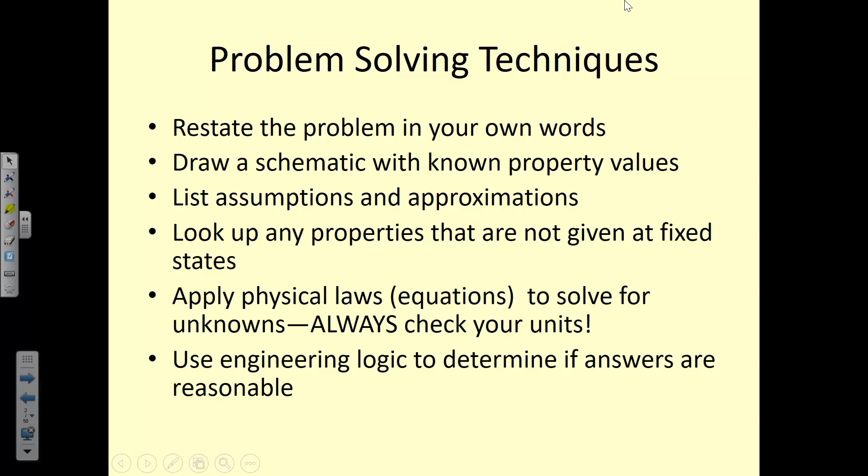All right, so for the exam itself, I have made an executive decision that you will be allowed to use your textbook on the exam. Is there anybody who doesn't actually have a physical copy of the textbook? PDF copies? Yeah, I do that too. I got one from the library because I was waiting for mine to come in. I just haven't returned it, I'll borrow one of his.

Okay, so who else needs one? Another one today, okay, three textbooks. I have a couple of extra ones. Some of them are older editions, but it's the same information. One of the main reasons is that there are so many equations we used all throughout the semester, and on the final exam there's going to be a lot of different tables you'll have to reference. I don't want to have to print a packet that's like 16 pages long for every student.

Having said that, just because you have your textbook on the exam doesn't mean you don't have to study before the exam. Because if you don't know where to find the information in the textbook, if you don't know how to use the tables, if you're relying upon Professor Waite to give you the correct tables for your problem, that's not going to happen, right? So you have to really know and understand how to use the book, where to find things. I would recommend using your book as a study tool and flagging certain problems or areas. At the end of each chapter, right before you go into the homework problems, there's a nice summary page, which would be good to identify and flag in each of your books.

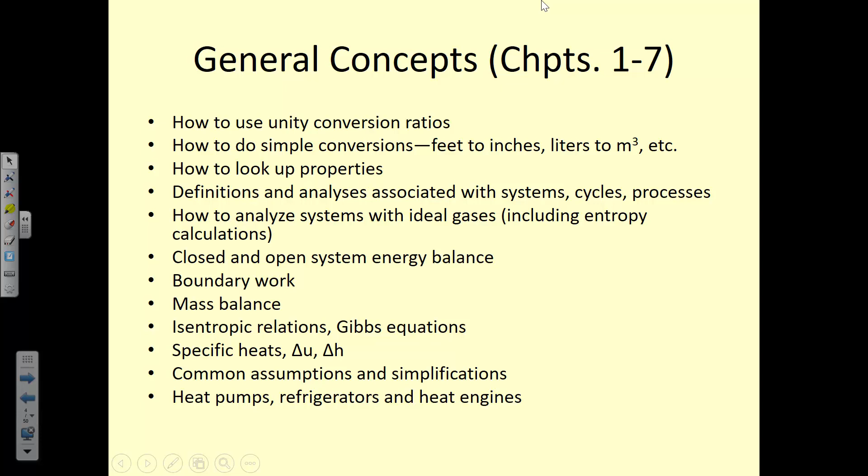General concepts - this is all stuff from last semester, you should know how to do all of these types of things: using conversion ratios, definitions that are basic to thermodynamics, like what is the first law, second law, third law, what is a system, what is a process, what's the state postulate, things like that. How to set up a system, the difference between a closed and open system. Also, any common assumptions or simplifications we've made throughout the 2 semesters, like is it an ideal gas, is it adiabatic, or is it constant temperature - I will assume you know how to make those for any given problem based on the problem statement. You should also recognize and know the difference between heat pumps, refrigerators, and heat engines - that's fundamental to understanding the problem statement for whatever mystery megalodon problem I give you. It could be a refrigerator, a heat pump, or a heat engine. How do you know the difference between the 3, and how would you know? Being able to identify and apply the appropriate equations is pretty important.

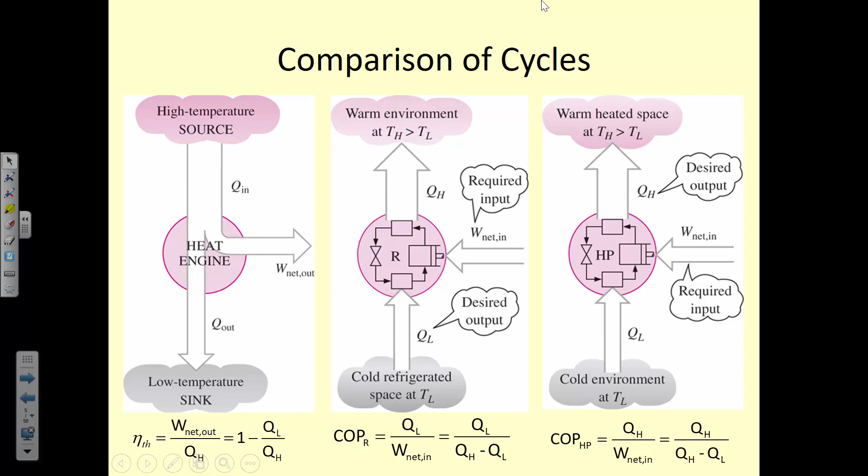Chapters 8, 9, 10, and 11 - these are the main bullet points from each. Chapter 8 was all about exergy. I'm not going to give you an exergy problem on the exam - you can say hallelujah right there. But I may ask you to calculate a thermal efficiency. I won't ask you to find the exergy destruction of all the steps and phases of some huge megalodon problem - that's not going to happen. But you should know what exergy is, and you should know how to calculate thermal efficiency. Chapter 9 was IC engines - you just need basic information: the difference between spark ignition and compression ignition, gas versus diesel, Otto versus diesel cycles, and what the air standard assumptions are that may come up.

And then how it is different—this applies not only to IC engines but other problems as well—the difference between assuming constant specific heats and assuming variable specific heats. We learned about that in more detail for ideal gases in Chapter 9, and we've used it in other places since. So what does that mean? What is the difference between assuming variable specific heats or assuming constant specific heats? I'll just throw that out there right now.

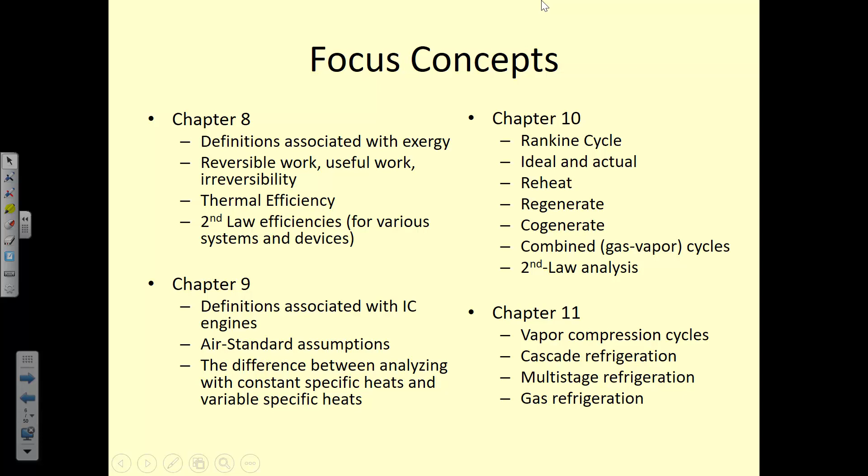But we're going to do just a little example of that again today, where we look through and say, okay, we're not going to solve this whole problem, but we're going to start with this system and say, okay, what do we know? What do we need to know? How do we find all of the states of this?

So this is something that has 12 states. By reading the problem statement and using some of the information given to us at the outset—they haven't outlined or dictated all the pressures in the problem statement, but they said see the table. And the table has the pressures of states 1 through 8. How do we find the pressures at 9, 10, 11, and 12?

And these are closed feedwater heaters, which means the fluids aren't mixing. So this just goes straight through, and this goes straight through, with the exchange of heat.

So pressures 9 and 6 would be equal? Okay, yeah, so pressure 9 is going to be equal to pressure 6, so it's 1400. And 7, 10, and 11 should all be equal too, right? 7... well, why 10? Oh yeah, 7, 10, and 11. Yeah.

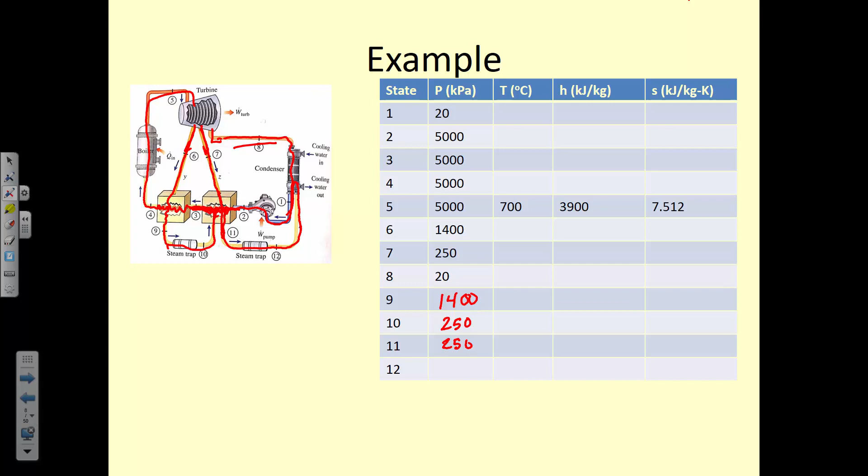Okay, so we've got the pressures now. What about the pressure at state 12? What is that? It means same as 11?

It won't be the same as 11, because this steam trap acts like a throttling device, so the pressure will decrease from 11 to 12. If it's a throttle valve, then H11 is the same as H12, right? Ooh, yes, good point. So 11 is equal to...

Okay, go back to the pressure—how do we know what the pressure is at state 12? Condenser pressure. Yeah, it would have to be the same as the condenser pressure. What's the condenser pressure? 20 kilopascals. Okay, so you should be able to look at these problems and think, okay, what's going on here. That looks good. All right.

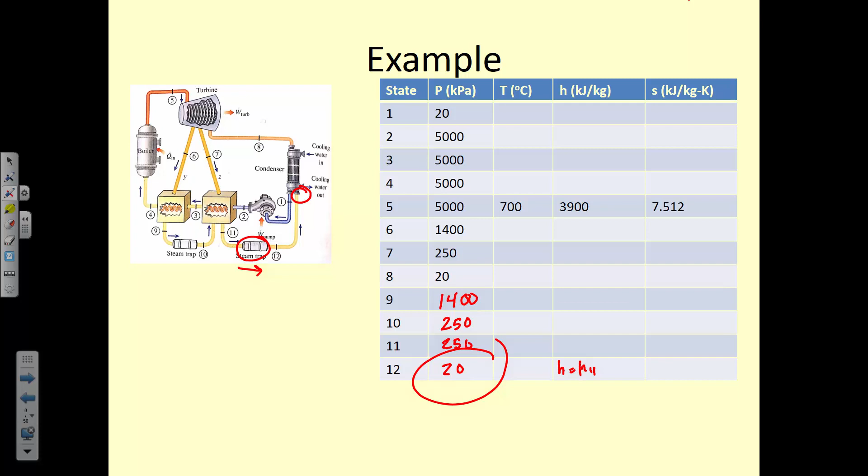So let's start thinking about enthalpies. We have the enthalpy at state 5. We looked that up because we know the pressure and temperature that was given. So we can look up the enthalpy, we can look up the entropy. Assuming it's an isentropic turbine, what do we know, or what does that tell us about some of the other states?

So we know state 5. What do we know about any other states? The entropy is the same as what's coming out. So at 6, 6 or 7 or 8, or what? All 3 - 6, 7, 8. All of them. 6, 7, and 8 are going to have the same entropy.

7.512. So now we know a pressure and we know an entropy, and we can find the rest of those enthalpies from the table. And these all happen to be superheated.

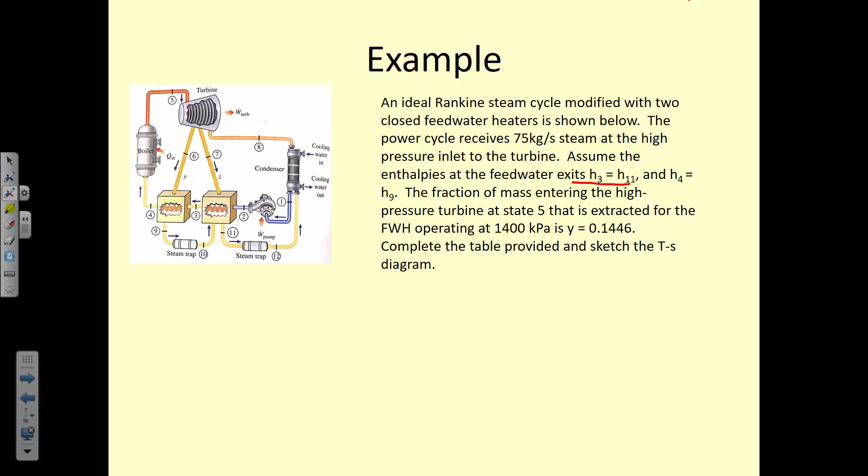All right, what other states can we find? I guess we should look at the problem statement. Assume the enthalpies at the feedwater exits: H3 equals H11 and H4 equals H9. That's good information. So this is going to be equal to H9. This is going to be equal to H11. We don't know 9 and 11 yet. How do we find those?

You said this was for the closed feedwater heater? Say that again? You said it was for the feedwater heater, right? H9 and H11... No, H9 equals H4 and H3 equals H11. H9 and H10 are the same. Okay, yeah, so H9 and H10 - we have another throttling device, so H10 is also going to be equal to H9.

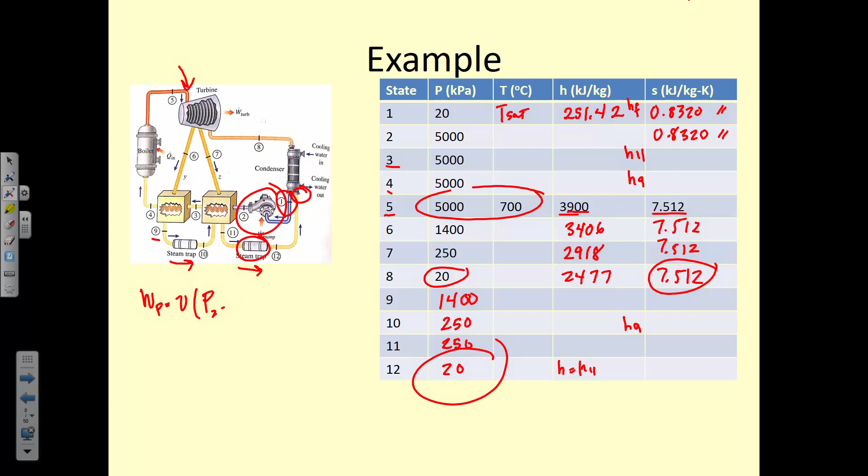Okay, what about state 2? Can we find anything about state 2? We can find the enthalpy based on the pressure. So from 1 to 2 is pump work, right? So the work of a pump is equal to V times P2 minus P1, which is equal to H2 minus H1. So H2 is equal to V times P2 minus P1 plus H1. Okay, so we can do that. We can look up our specific volume - it's V sub F at state 1. And when we calculate this, we find it's 256.48.

Okay, so some other things that we can assume is that state 9 and state 11 are saturated liquids, that they exchange all of their heat with this feedwater so that they come out as a saturated liquid. So anytime you come out of a feedwater heater, it's a saturated liquid, generally. But 3 and 4 actually end up being slightly compressed liquids in this problem. So state 9, state 11 is liquid coming out because we want our feedwater heater to exchange all of the heat from the steam with the pumped water.

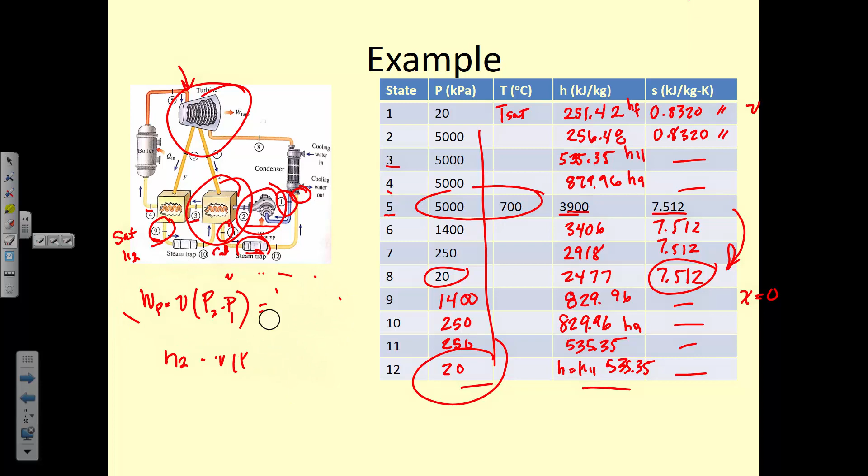And then if we were to look at this on a T-S diagram, how many lines of pressure would we see? How many different pressures do we have? 12 different pressures? No. Four - yeah, there's 4 different pressures. So we have 5 megapascals, 1.4 megapascals, 250 kilopascals, and 20 kilopascals.

So if we were to draw our points, if it's isentropic, it goes from this state 5 to 6 to 7 to 8. 8's kind of like maybe on the line, maybe under the line. And then we know that states 1, 11, and 9 are saturated liquids, and 9 is here - no, 9 is 1400.

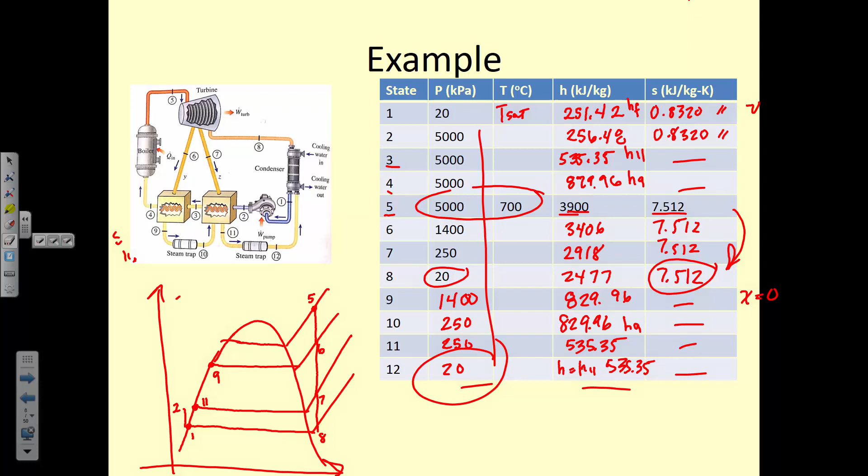Okay, we know that from state 1 to 2 is isentropic. And then we have all this going through here. States 2, 3, and 4 are also at 5 megapascals - this is 5,000, 1,400, 250, and 20 - so they're also on that line. State 4, state 3, and then from state 9 to state 10 is a constant enthalpy process, and state 11 to state 12 is a constant enthalpy process as well. Constant enthalpy just looks like a diagonal line on the TS diagram. I think that's all our states.

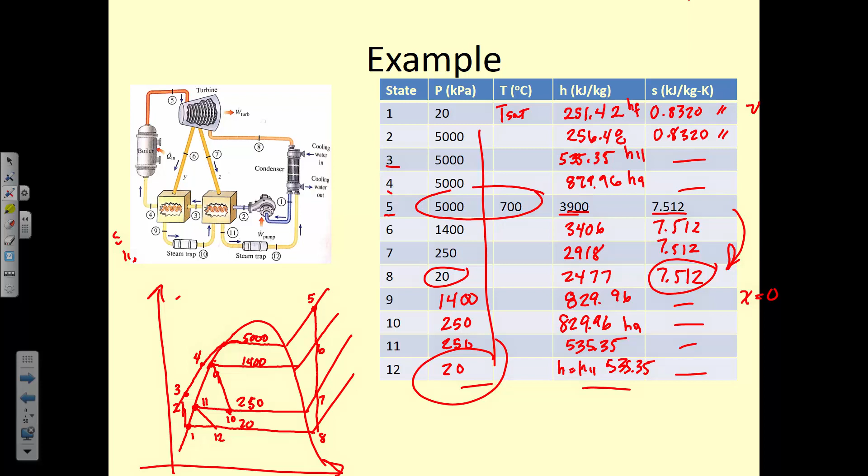All right, so again, review those types of problems. We've done so many examples of them throughout the semester, so look at them, review them, make sure you understand how to find things in many different scenarios. Maybe you're given the inlet conditions on the turbine, how do you find the outlet? Maybe you're given the outlet conditions, how do you find the inlet? If you have pumps, if you have throttling devices, whatever things you have available to you as tools to analyze and look at them, make sure that you understand how it works and how it's different.

Okay, so chapter 12 was when we were looking at all those partial derivatives and Maxwell relations and the property relations for the real and ideal gases, and we were using the generalized departure charts. I'm not going to give you a problem where you have to use the generalized departure charts on the exam. But you may be asked to use some of these property relations, like you should know how Maxwell relations work, so refer back to the old exam for examples of types of things I might ask you on that.

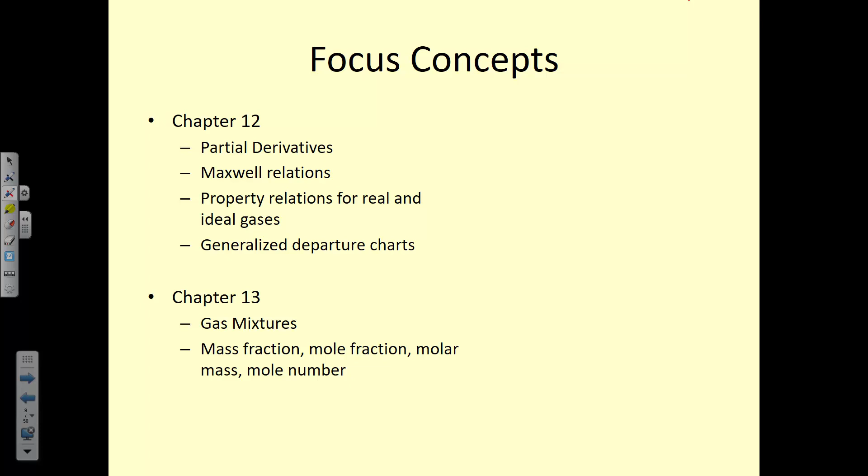And then chapter 13 was all about figuring out how to analyze mass and mole fractions of combinations of substances, and in that case we were looking at gas mixtures for that.

So the Maxwell relations to review - these should be familiar - they are based upon the 4 Gibbs equations, and then we come up with these Maxwell relations which allow us to calculate a change in temperature versus volume at constant entropy and say, okay, that's the same as if we wanted to calculate the change in pressure versus entropy if we hold the volume constant, but it's also negative. So knowing how to take one of these equations and use it to find the other one - not the derivation of how you get to this point, but let's say I gave you some equation for specific volume in terms of temperature and pressure, you would need to know how to take the partial derivative of that and then apply the Maxwell relations in order to find whatever I asked you to find.

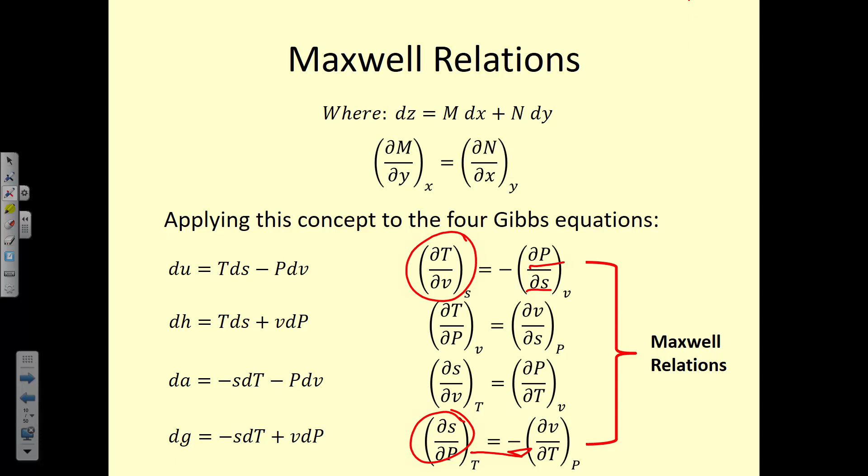And we've done examples of that in class and on the exam. We had a problem that was similar. So in general, finding properties using these equations - if you look at it in the general form, or if you integrate it from T1 to T2, and then use the departure charts - I'm not going to ask you to do that, but that's how those equations work. And then the general form for internal energy, the general form for entropy, and again, we're not going to do the approximated form of the departure charts, because there's so little time for me to torture you. I have to really pick and choose what I want to use.

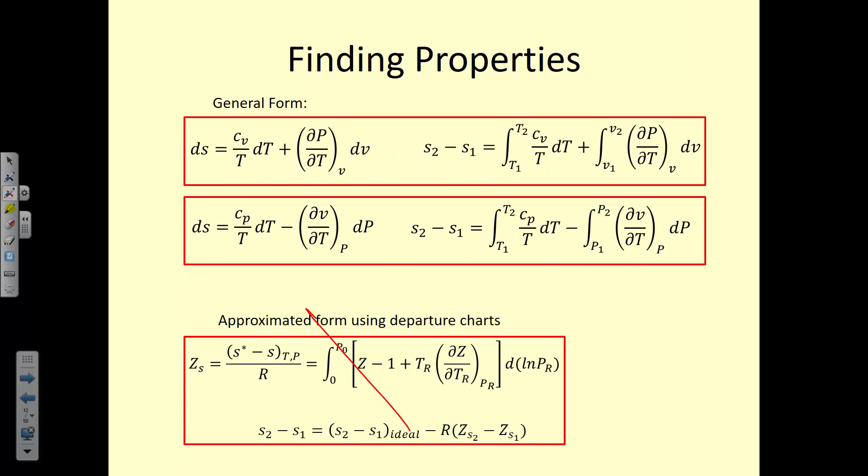Okay, chapter 14, or chapter 13 - oh, it was there. Okay. I didn't talk about that because we're doing it in other ways.

Okay, chapter 14, specific and relative humidity, so knowing the difference between the two, how to calculate them using these equations. If you need to calculate how much water vapor is in something, pay very special attention to this, to the homework problem that we did, to the example that we did in class of how to calculate how much water vapor is in a mixture of something, say for example in a combustion process - that's important that you know how to do that. So that hails back to chapter 14.

And then we talked about finding the enthalpy of that mixture of air. So atmospheric air is both dry air plus some water vapor, so knowing how to calculate or find the enthalpies for that mixture.

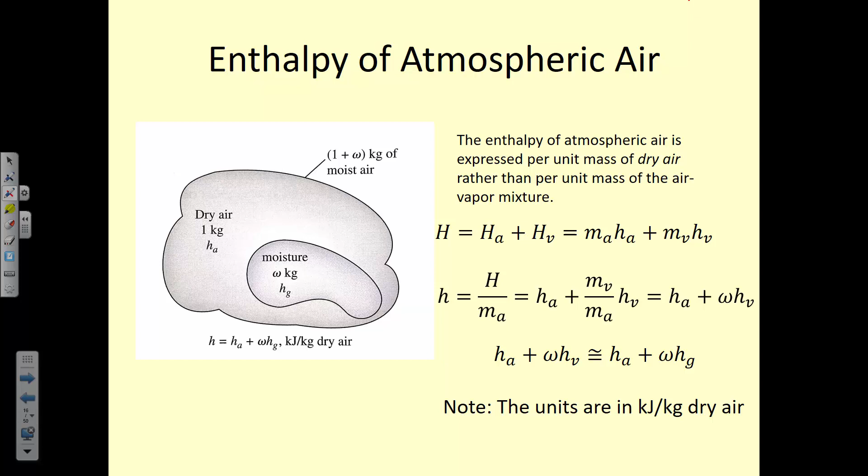Simple definitions like what is the dew point, what does it mean, how do I find it on the diagram. The adiabatic saturation process was a way for us to determine an unknown specific humidity. We can also do the same thing using dry bulb and wet bulb temperatures.

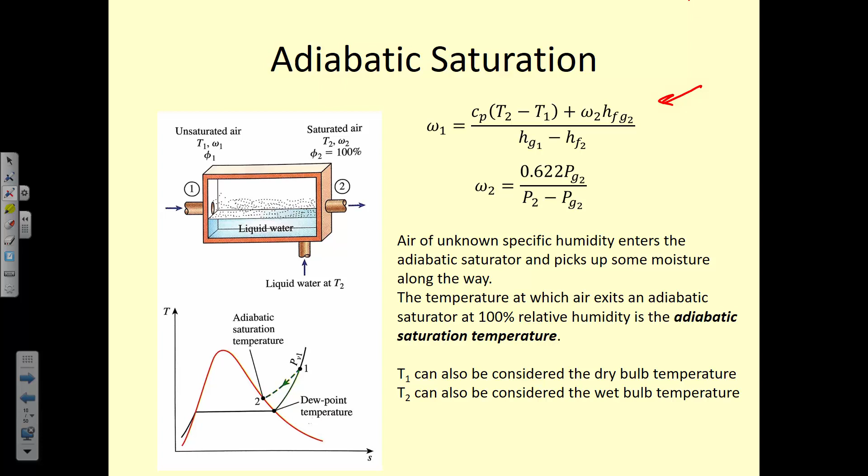Understanding and knowing how to use dry bulb and wet bulb temperatures in these equations to calculate humidity. So we did that as an experiment in class. We've also done homework problems and example problems in class about that.

And then using the psychrometric chart, this may be one that I end up printing and including in the exam, because I will probably have you draw a process on the psychrometric chart. We've done examples of that, and there are some we'll look at in just a minute with heating, cooling, humidifying, etc. I want you to be able to pinpoint two points on the chart, but then also figure out how you get between the two points, because it's not just going to be a straight line.

Sometimes you cool the air first, remove some of the humidity, heat it back up. You should understand what each of those processes represents on this chart.

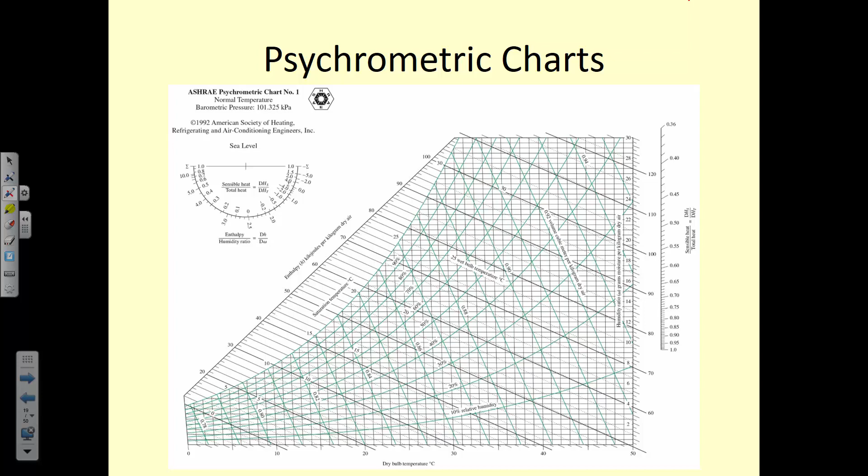So if we look at the lines and what they mean, what they represent: we have constant specific volume lines, enthalpy, wet bulb temperature, dry bulb temperature, humidity, the saturation line, and then constant relative humidity lines that go through like that.

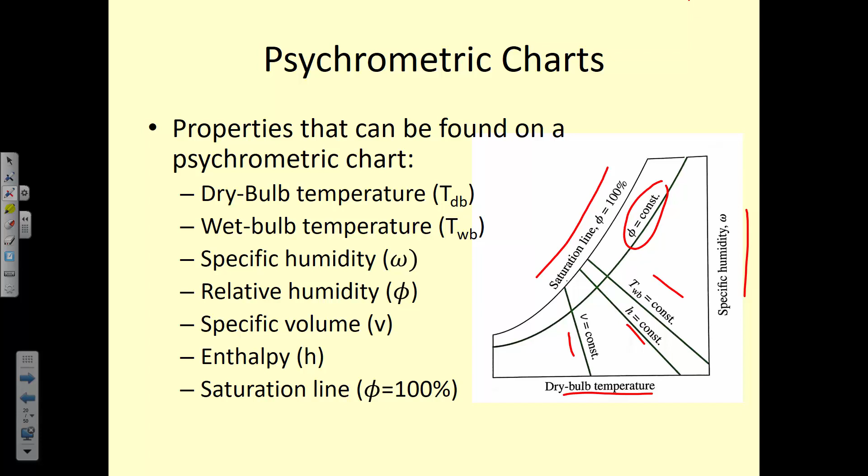So knowing how to find those lines, what they mean, how to identify points given two independent variables on the psychrometric chart, and then as we go and look at problems, what does it mean to dehumidify or humidify, okay? And what is the difference between increasing relative humidity or increasing specific humidity? How do I do one versus the other, right?

So what's the difference between relative humidity and specific humidity? Or first, what is specific humidity? It's a mass ratio of kilograms of water to kilograms of air. It's the amount of water that's in the air. Okay, so what does that mean? What if it's 0? That's dry - there's no water in the air.

And it can go from 0 up into - well, it's raining. It's not relative humidity, it would be like you're not in air anymore, you're just in water. So if you go into a river, this specific humidity would be some very high number. Okay, so no, it would be infinite - yeah, it would be infinite, because you'd be dividing by 0.

Okay, so that's specific humidity. What's relative humidity? It's the percent of saturation - the amount of moisture in the air versus how much the air can hold.

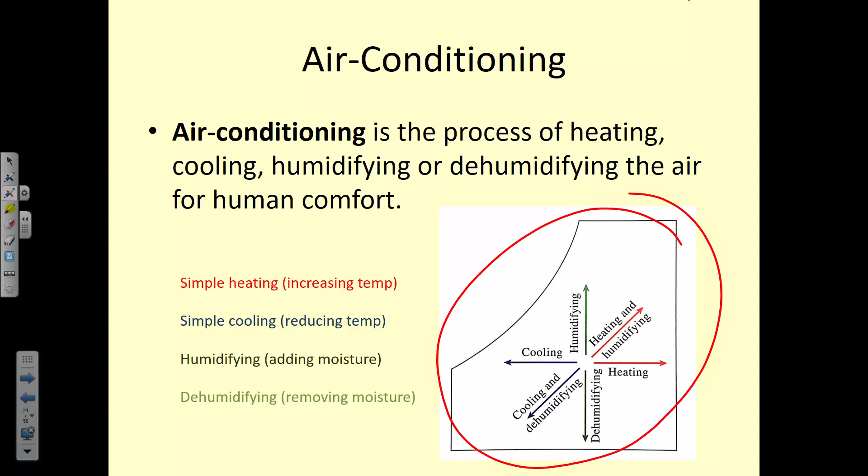How do you raise relative humidity? You can add water, you can cool it. So you either decrease the temperature or you add more moisture to the air. Knowing what those mean physically and how it's represented on the psychrometric chart is very, very important.

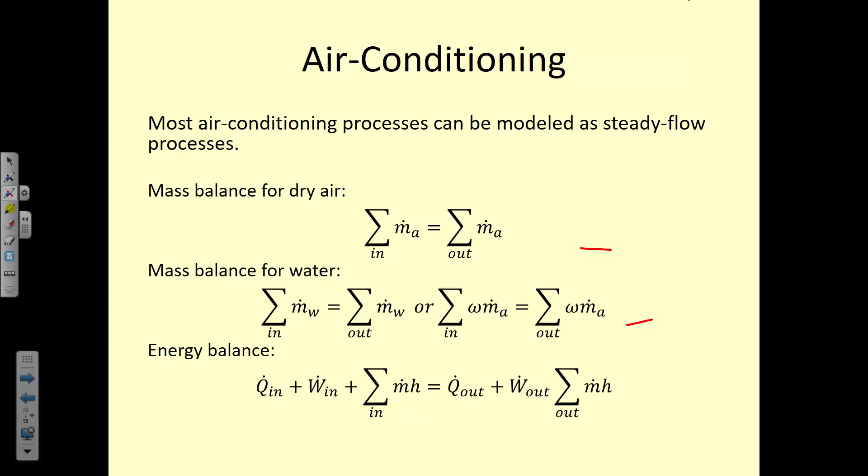Okay, so air conditioning processes, we can look at them as a steady flow engineering system. We can do mass balance for air, mass balance for water, we can do an energy balance. We've done lots of examples of that.

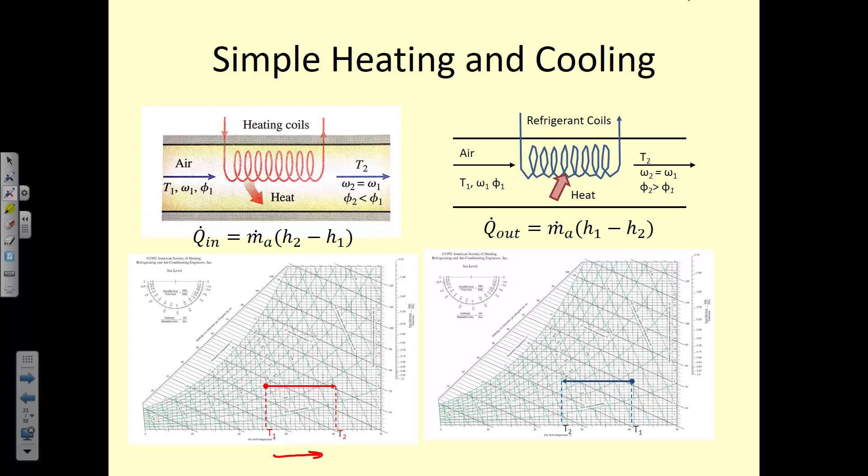So if we look on the psychrometric chart for simple heating or simple cooling, heating just means increasing dry bulb temperature, cooling means decreasing the dry bulb temperature. If we're heating or cooling and we're changing the humidity as well, we need to know how that looks.

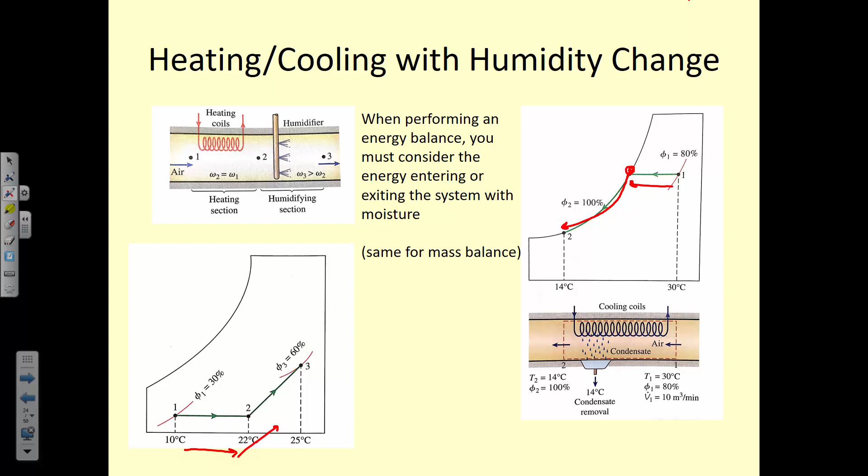So if we first heat the air and then we add moisture to it, or if we cool the air and by so doing we reach saturation and we have to remove moisture from the air - knowing how that works and what it looks like on the chart is important.

And then evaporative cooling, which is a cooling effect achieved by evaporating water from a substance or surface or within the air. And knowing that evaporative cooling follows approximately the lines of constant wet bulb temperature or constant enthalpy.

Okay, which brings us to combustion. And so knowing all those definitions related to combustion: what is a product, what is a reactant, what does ignition temperature mean, and knowing these rules.

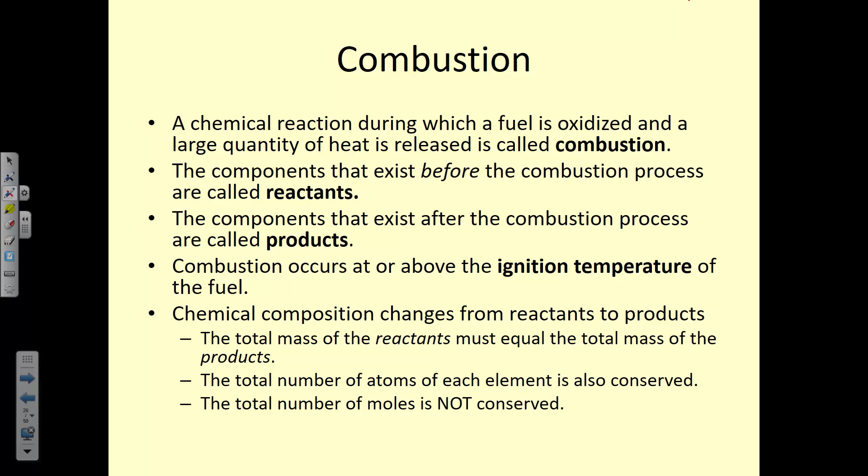So the chemical composition of the products and the reactants is not going to be the same because you've gone through some process that changes it. Knowing facts like that the mass has to balance on either side of the equation, and the total number of atoms has to balance, but the total number of moles is not necessarily the same. Okay, that's a good true or false question there, right? Those kind of facts.

Oxidation just means that we're combusting the fuel in the presence of oxygen. Usually it's air, and a lot of times we need to calculate the air-fuel ratio.

So how much air is required or used in order to have this combustion process proceed. So knowing what it means when we talk about excess air, deficient air, theoretical air, stoichiometric air, all of those kind of definitions that go along with that. And it wasn't that long ago that we did these kind of problems, so hopefully they're fresh in your mind.

I'm going to have you work together in groups, because one of the things I noticed on the homework is that your balances were not correct. So be very, very careful when you're doing the balance, because if you do it wrong in the initial stages of the problem, everything is wrong after that. And it makes it a lot harder for me to grade, because I don't know if it's wrong because you did it wrong, or if it's wrong because your number in the beginning was wrong. So when you're putting that stuff in, it gets kind of complicated. So work on these together, maybe take about 10 minutes, work with a partner, group of 3, however you want to do it. And then we'll come back together and look at the answers.

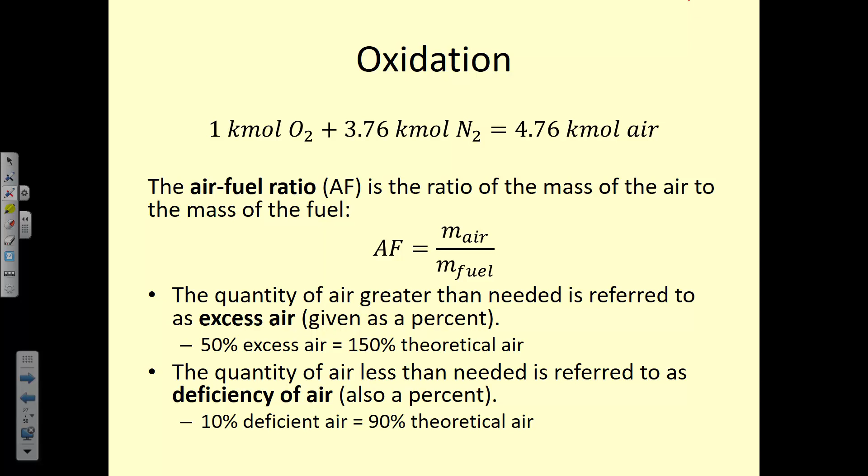Okay, so once we have balanced our combustion equation, then we can look at the enthalpies on both sides. We can do an entropy analysis. We can perform a first law and a second law analysis on these combustion equations so that we can calculate whatever it is that we want, entropy that's destroyed or generated, or exergy destroyed. So we have a couple of different scenarios. The first that we look at most often is an open system, so we have air coming in, fuel coming in, and then some byproducts coming out. Sometimes, in a couple of the examples in homework, we had a closed system where maybe you have oxygen plus something else inside of a closed container, and then when you add heat to it, it ignites or it combusts, and the reaction occurs.

So we're not going through the examples of doing this, because we've done a lot of those examples in class and on the homework and things like that, but I want to point out a couple of things that I saw on the homework that I think were problematic. So this enthalpy of formation, you look that up for every reactant and every product. For O2, N2, and several of the other diatomic molecules, that enthalpy of formation is 0. So make sure that you are very systematic and methodical when you're looking these property values up, that you first separate your products from your reactants, but then also look up the enthalpy of formation for each of them and get the correct value.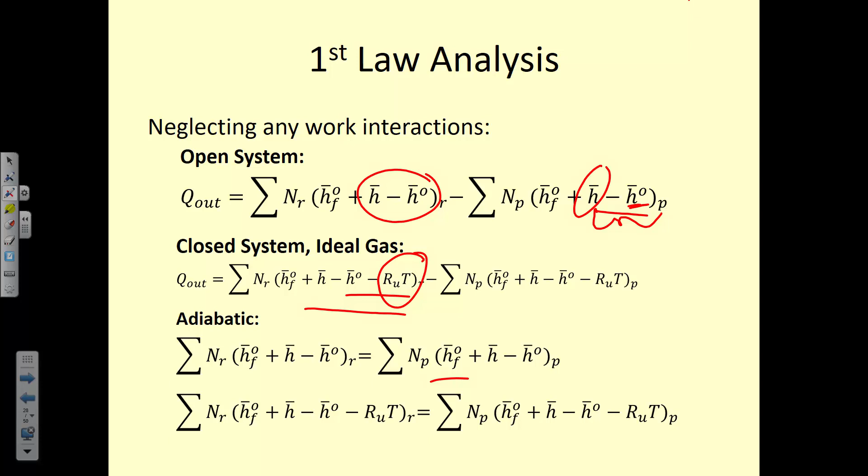Go back and review that homework that hardly anybody did. I know you didn't do it, so you need to know how to do it, because this will be on the final. There's going to be a problem like that we did on the homework. It will be a combustion problem, so you have to be able to balance the reaction. You have to know which enthalpies to look up and what part of the equation they go into. And you have to know how to calculate these entropy terms.

That's going to be a big chunk of the final. It's going to take you a long time. It's going to be worth a lot of points. And I'm forewarning you, so there's no excuse for you to not know how to do that.

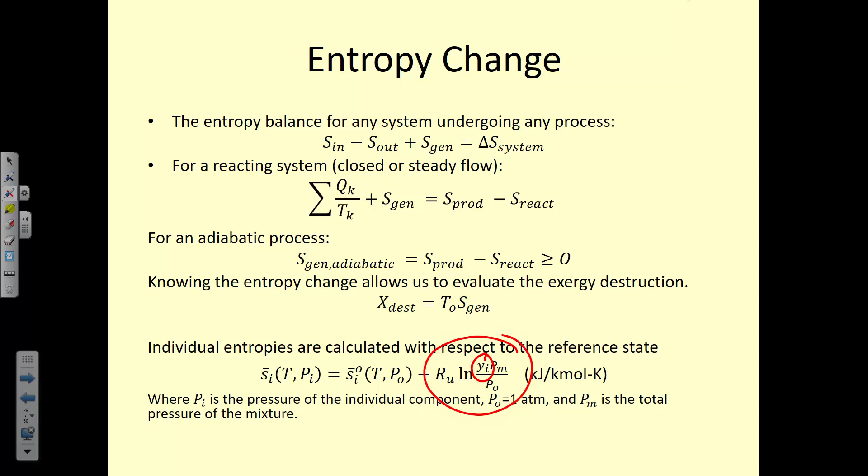All right. Okay, so renewable energy, yes. What chapter was that from? 18. Yeah, 18.

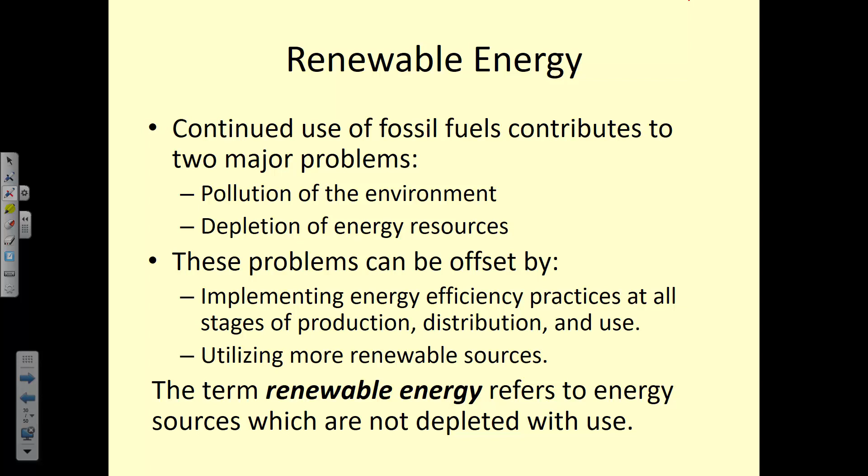So, carry on. All right, so renewable energy, again, this is from chapter 18, which was the online chapter. Any notes that you want from that, you will need to put onto your two sheets of pages of notes, because you won't have access to this in the exam. I'm not going to let you look it up or anything like that. So, knowing how to analyze, let's see, so let's go back to this one.

So chapter 18, these are the things I want you to focus on. Any of the definitions and nomenclatures that we use. So what is a flat plate collector? What is a trough collector? Being able to identify things and to know definitions of things is important. So all of those definitions from chapter 18 you should know.

I'm not going to ask you, what's the process of converting corn to ethyl alcohol? You're not going to have to know that, but you would have to know the conversion of corn to ethyl alcohol is an example of what type of renewable energy? Oh, that's biomass, right? Okay, so things like that. So what is biomass? What is geothermal? What is solar? What is wind? What is those sorts of things?

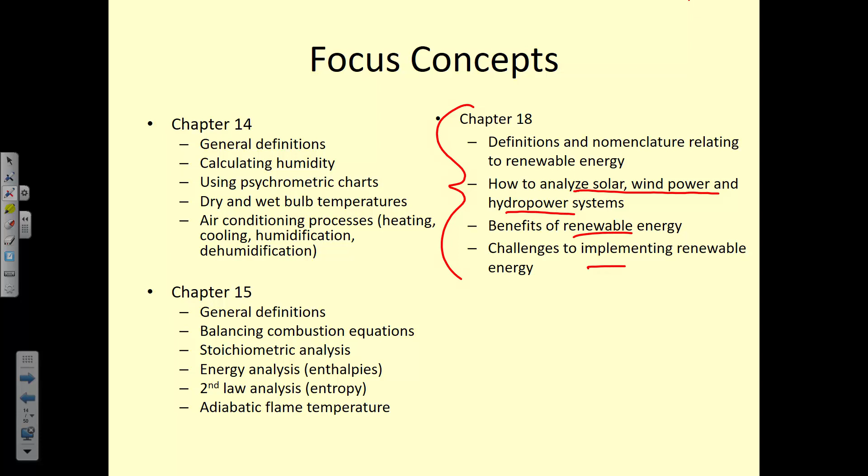But you will need to know how to analyze solar, wind power, and hydropower systems. So there's some equations for those. They won't be any more difficult than what we've seen in class or on the homework. But then the rest of this is mostly conceptual. So the benefits of renewable energy, challenges—this is where an essay question is most likely to come in from that.

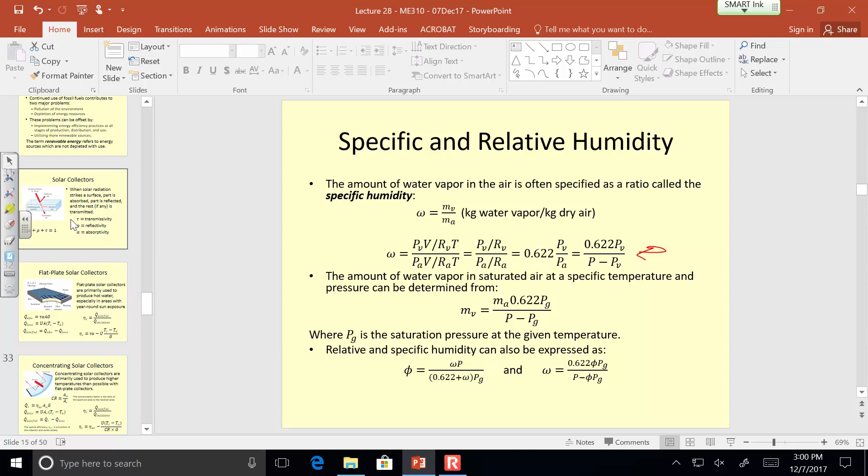All right. So solar collectors, knowing, again, these kinds of definitions—I'm not going to ask you to calculate these: transmissivity, reflectivity, absorptivity, that's a different class.

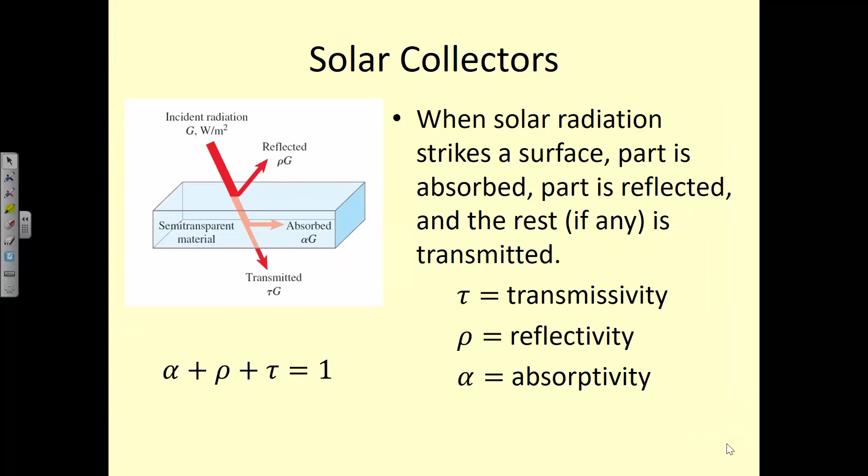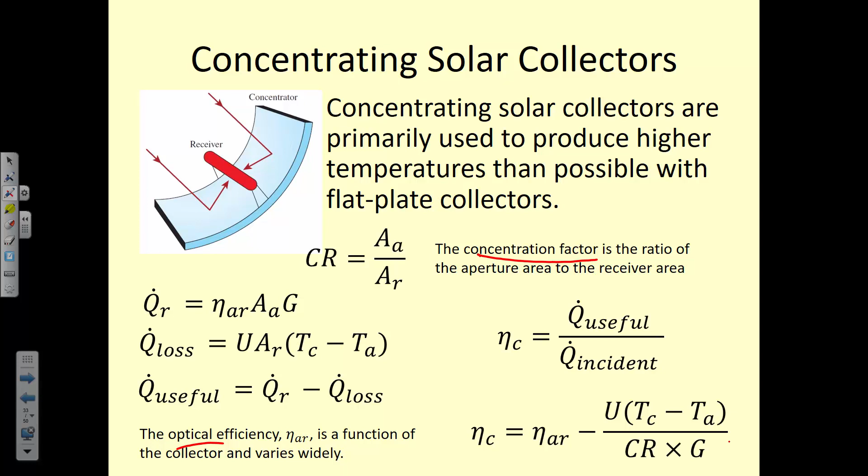Flat plate solar collectors, those equations are all important. You may need to analyze or calculate using those. Concentrating solar collectors, again, useful and important equations. Knowing what these things mean, so what is a concentration factor, what does it physically represent, what is optical efficiency, what is—these types of things, what do they mean? Thermal efficiencies, how you would calculate them for a solar power plant or maybe for a solar pond, what's the maximum thermal efficiency that can be achieved.

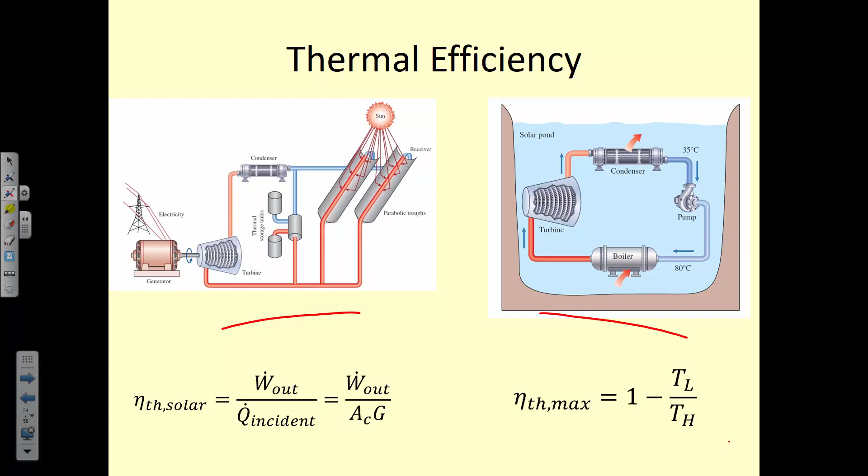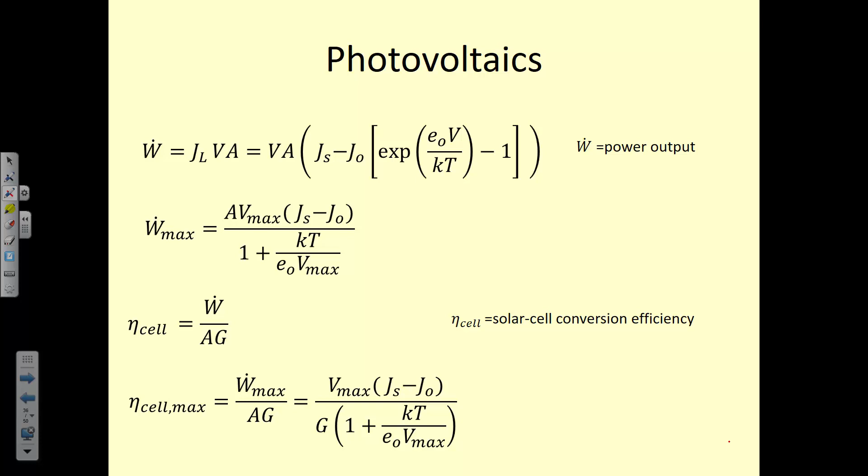And then these photovoltaics, on the homework we did have some problems where we had to calculate this, let's see, the voltage, the max voltage or something like that. You have to use solver to do it. I'm not going to give you one of those problems, but you may have to use any of these equations. So I would write them down and I would know what J sub L means and J sub S and J sub naught, what are those things.

Passive solar applications - we did some examples where we looked at sun incident solar radiation on sides of buildings. If I want you to use that table, I will print it and include it in your exam. How to calculate how much solar radiation is on a building, how much heat may be gained.

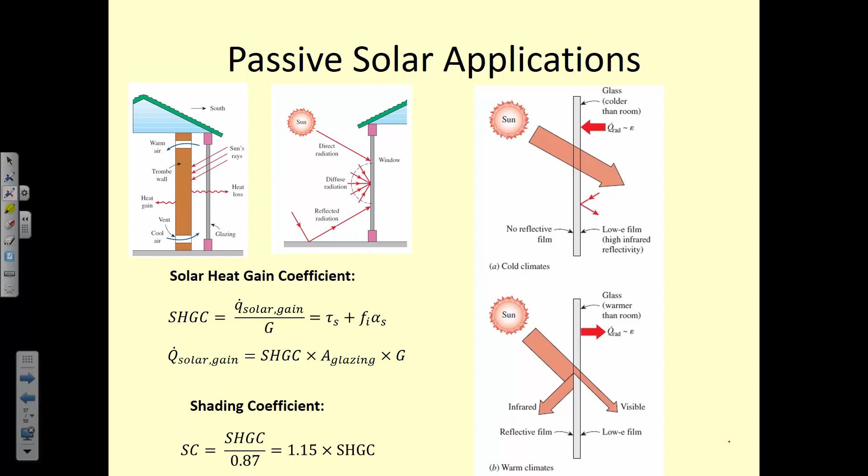How you can choose the right windows, maybe something like that. I think there was one question where it said they had double pane windows. Is that the same as double glaze? Yes. Double glaze, because glaze is not like a glaze - people who put in windows are called glaziers, or glaziers in French, it comes from the French word. So double glaze means double pane, two sheets of glass with air in between. It kind of seems like you'd think of glaze as like glazed donuts, or something you're putting on the window, but no, that's the glass itself, double glazed. It's just another way of saying it, kind of an old-timey way of saying it.

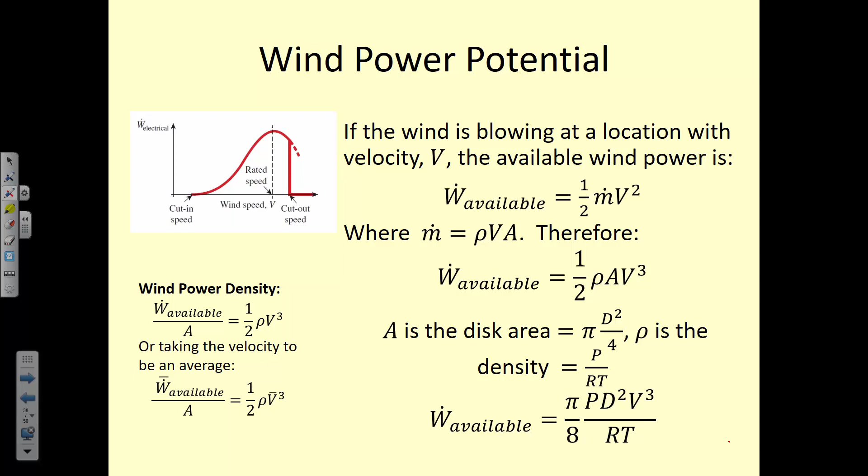Wind power potential - being able to, given certain conditions, calculate how much wind power would be available, maybe being able to compare two areas one to another, see which one is better. There may be some sort of an economical problem that comes in with this where I say it will cost this much to build it, how long would it take to pay it back? I haven't written the exam yet, but I do know what I am putting on it.

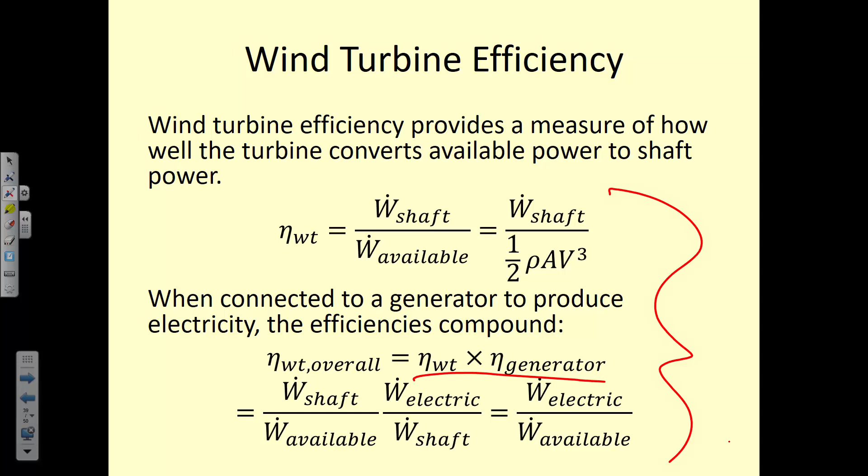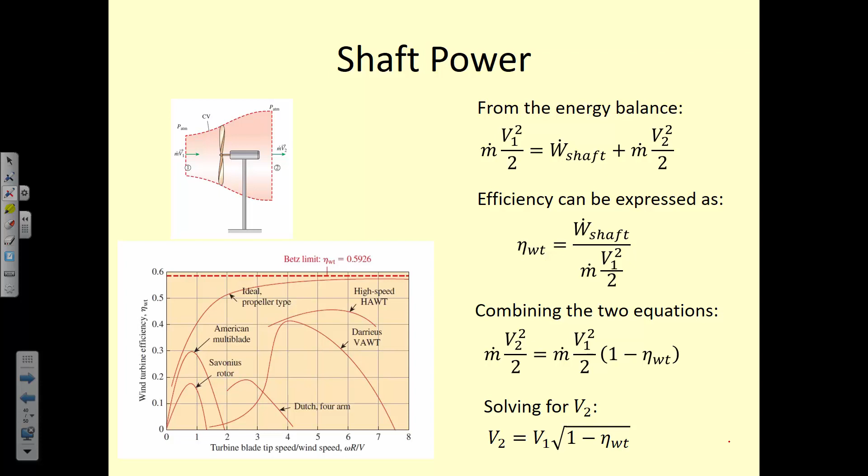It's not possible - you can't bring the air to rest to extract all of its energy, on the other side of the blade. So you can't go from some velocity to zero velocity. It would be like you're in some kind of a tiny space warp if you were able to do that. Does a similar law to the Betz limit apply to fluid turbines? Yes.

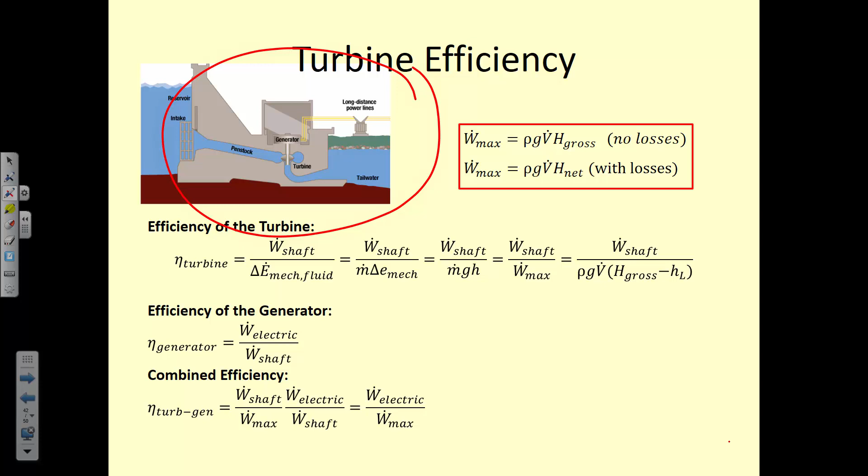So hydropower, how to calculate - knowing what this means for hydro turbines, stuff like that. Yeah, so all of that stuff.

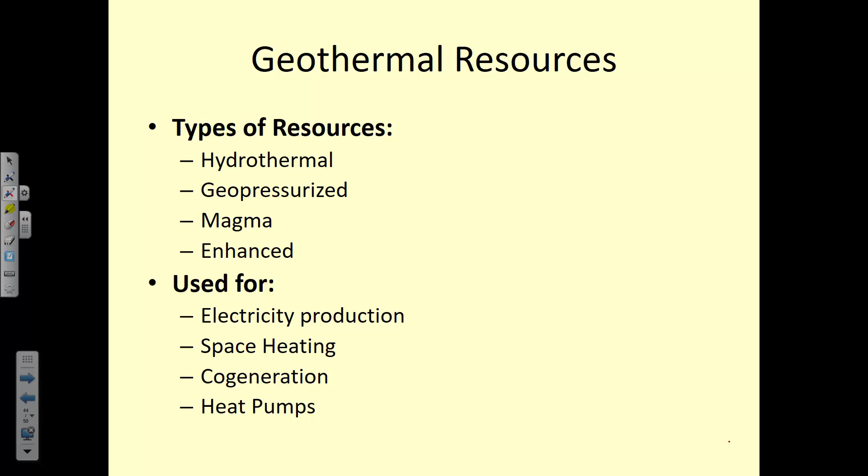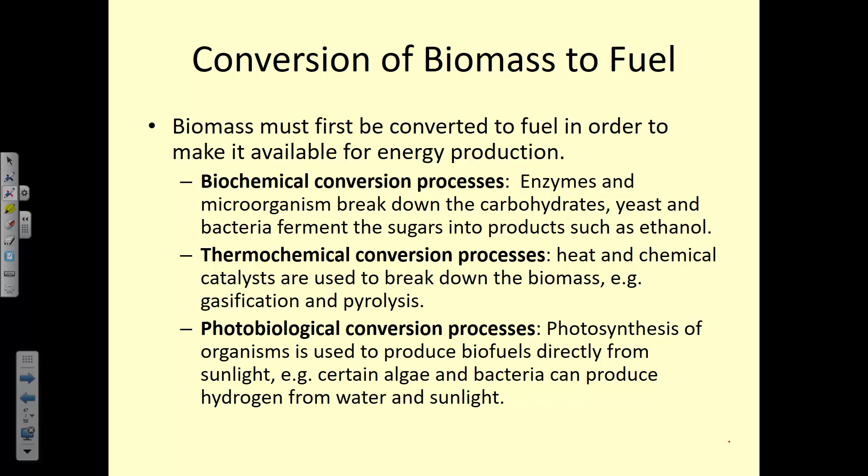And then when we talk about renewable energy - geothermal resources, where can you find them? What do you do with them? Biomass energy, what is it? What are some of the sources? How do you convert it? Not necessarily in detail telling me how to convert it, but just kind of generally that it's either a biochemical process or a thermochemical process, or it has to do with light. What are some of the products? How are they used to produce energy?

And then, talking about municipal solid waste, like the video we watched, maybe some of your opinions on that. I don't know, I haven't developed that question yet.

Be very focused in your studying. Make sure that you address your weaknesses. So if you can't figure out how to calculate quality, and that always trips you up, you better figure out how to do it, okay? If you can't do the combustion equations, you better figure out how to do it. If you had trouble on homework 11, and you didn't do the homework 11 yourself, then you really better figure out how to do it.

That's my advice. If you have any questions, email me, I'll be around, probably not on campus, but if you needed me to come to campus to meet and talk about things, then I can set up an appointment or via Skype or however you want to do it. I'm happy to help you. I don't like to just give you a super hard exam and watch you all fail. That feels terrible as a professor to have your students fail. Some people may like it, but I'm not sadistic that way.